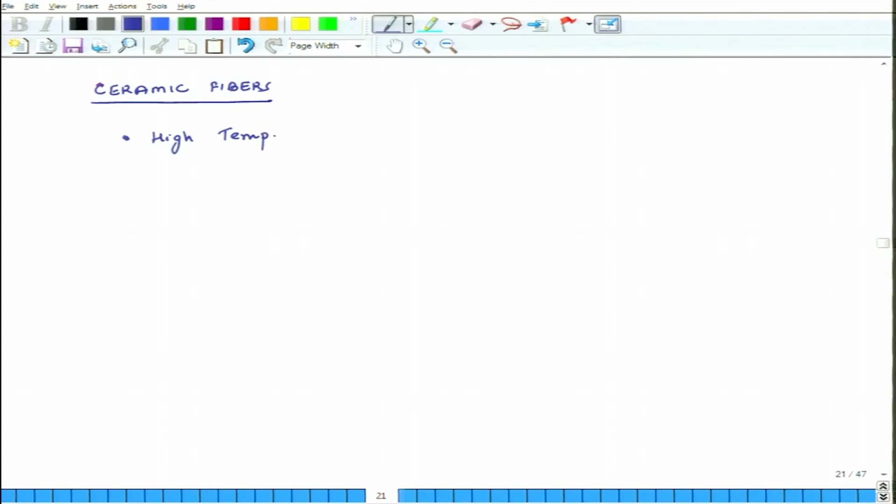Now we are talking about ceramic fibers. Typically these ceramic fibers are used in high temperature applications, because the nature of ceramic material is that it can take a very large amount of heat without getting burnt, distorted, or chemically degraded. So a very important application of ceramic fibers is high temperature applications, because they have high strength and high modulus even at elevated temperatures. You can raise the temperature in case of silicon carbide fibers, which are ceramic fibers, even up to 600-700 degrees centigrade and the properties do not change. In case of alumina fibers, Al2O3, you can go even up to 1300-1400 degrees centigrade and still the properties will not change.

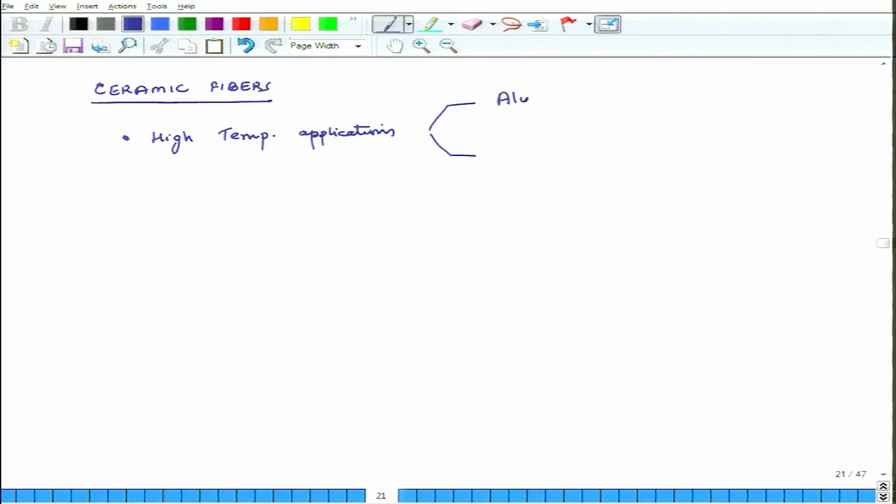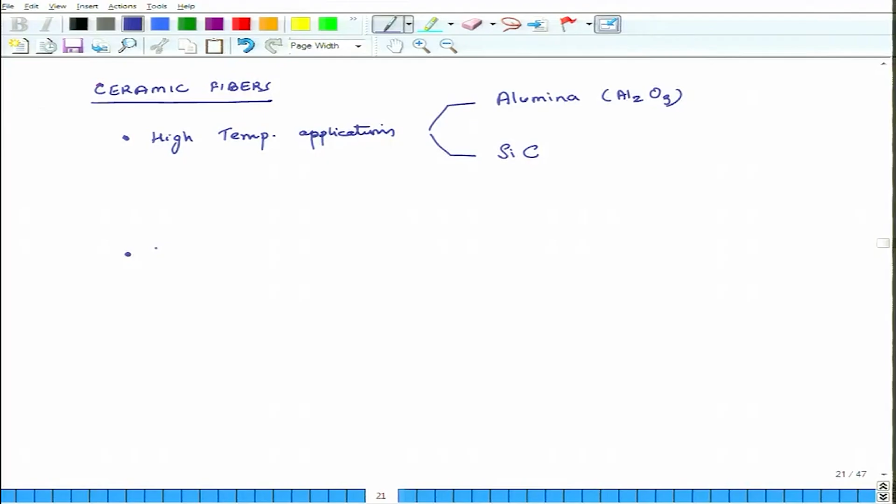Common examples of these fibers are fibers made from alumina and fibers made from silicon carbide. This is Al2O3. So, very quickly, how are alumina fibers made? Al2O3 fibers.

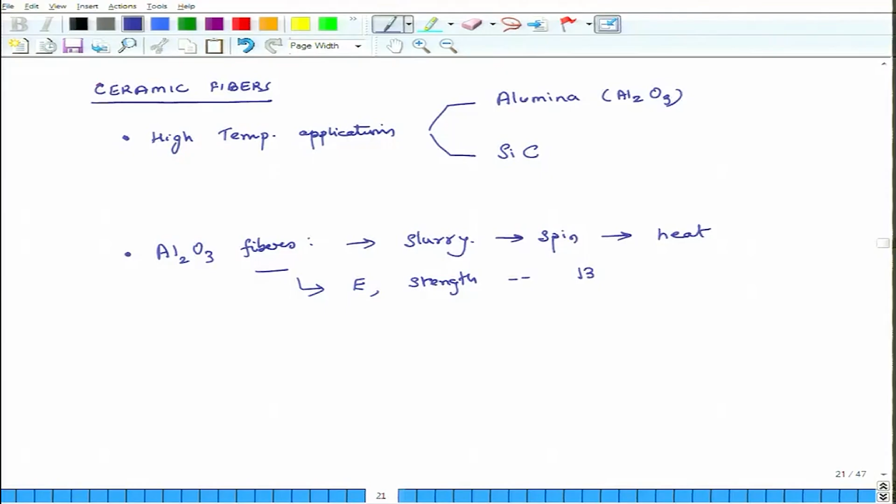You have aluminum oxide, and from that you make a slurry. You mix it with water and make a paste, and through that paste you make a slurry, and then you spin it. You spin it and start getting fibrous shapes, and while spinning it into fibrous shapes, you also heat it, and then you get these fibers. These alumina fibers have been shown to retain their mechanical properties, that is Young's modulus, strength, etc., as high as 1370 degrees centigrade. So this is about alumina fibers.

About silicon carbide fibers - these are made either from the CVD process, which is chemical vapor deposition, or from the process known as pyrolysis, which we have discussed earlier. These fibers can retain their strength up to 650 to 670 degrees centigrade. Where do you use these? I have already said that you use them in high temperature applications, but what kind of applications are there?

Here the fiber is ceramic, but if the matrix starts degrading at low temperatures, there is no point in using these things. So you also want a matrix to withstand high temperatures. They are typically used in metal matrices - metal matrices plus ceramic fibers. These types of composites we had earlier mentioned are known as cemets.

Earlier yesterday we discussed boron fiber, and a problem with boron is that it tends to react with metal very vigorously, which can create problems because of reactivity. But if you embed ceramic fibers - ceramics are very inert materials - in metal matrices, there is not a whole lot of reaction between the metal matrix and the ceramic. So chemically they are much more stable, less reactive, and they have high resistance to high temperatures.

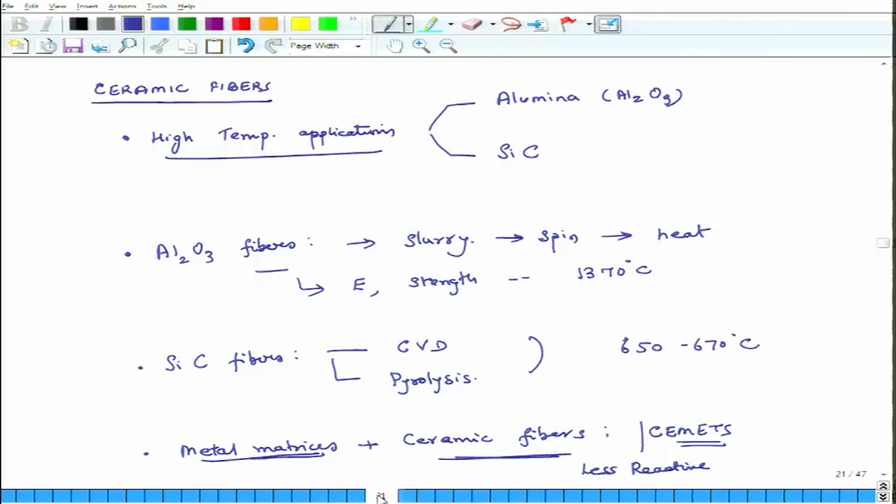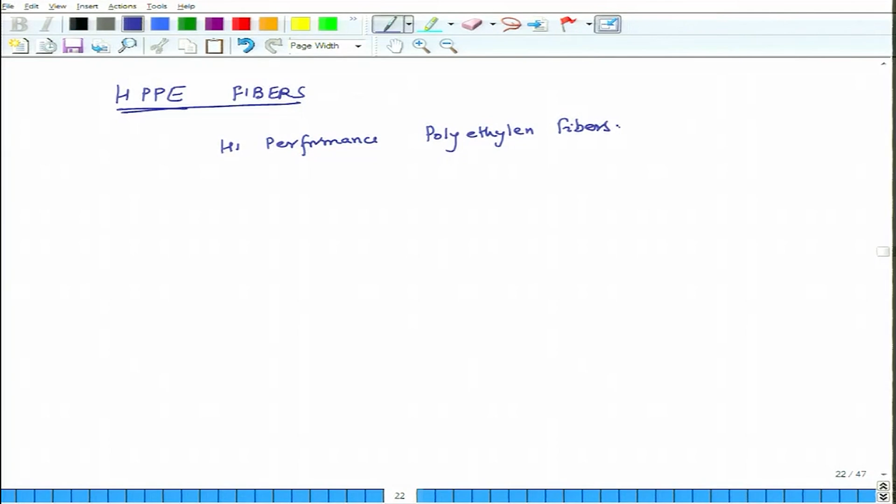The other class of fibers is called HPPE fibers - HPPE fibers. So what are HPPE? This is high performance polyethylene fibers. Now these are very interesting fibers and they have some very neat applications, but before that, they come in different names. So this is HPPE.

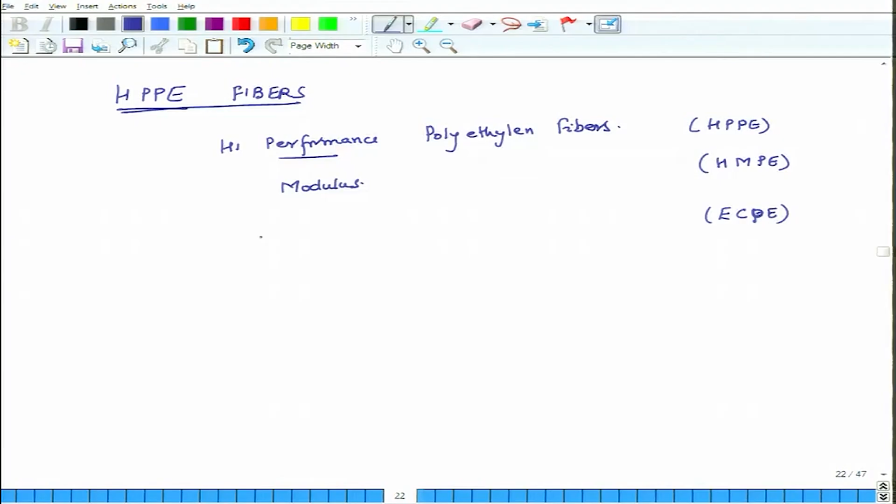Sometimes we also call them HMPE. So what does M stand for? M stands for, instead of performance, here we have modulus - high modulus. And another name for them is ECPE. So these are all common names, it is useful to know that. What is ECPE? Extended chain polyethylene fibers. So that is ECPE, but all of these three, four names, they mean essentially the same thing.

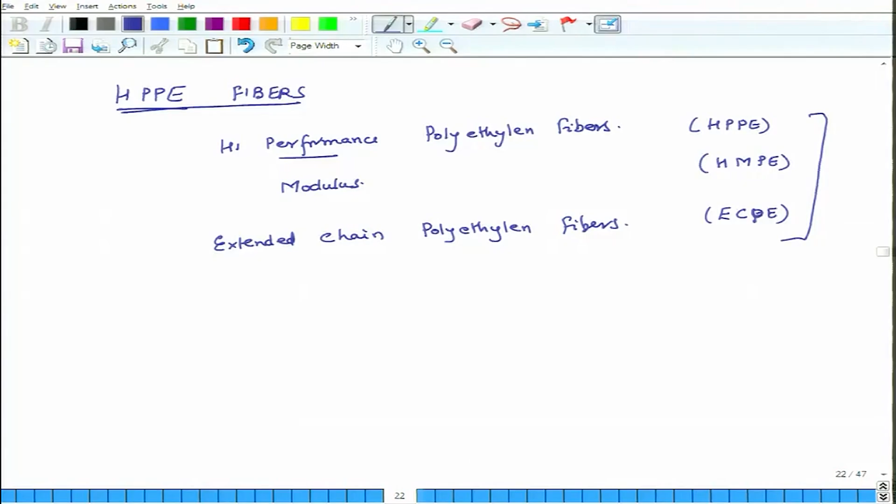In the market, some of the brand names which are known are Dyneema, Spectra. So you might say I need Spectra fiber, that will imply one of the HPPE fibers, but these are brand names. Let us look at some of their special attributes.

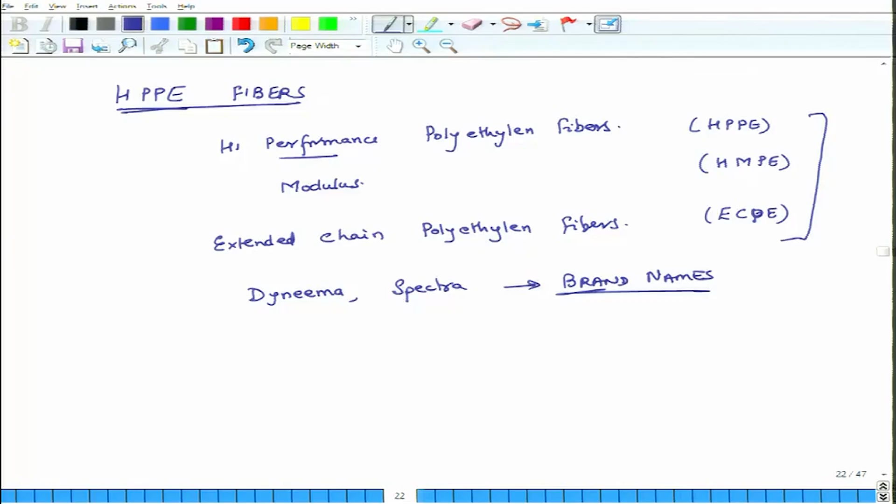We will look at actual numbers later, but let us look at some attributes. A typical plastic, for instance ABS plastic or polyester, if you pull it, its strength will not exceed maybe tens of MPa. Some super good plastic may be 100, 200 MPa. But these HPPE fibers, their strength is very high.

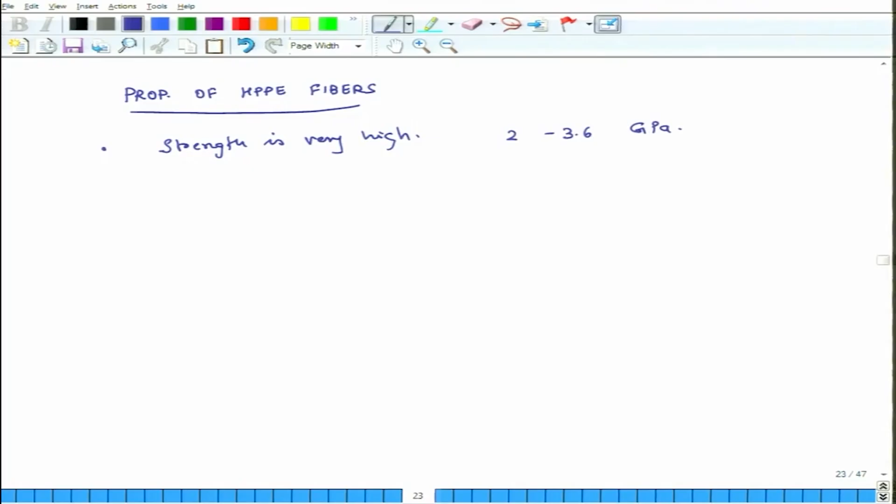What do we mean by high? It could be anywhere from 2 to 3.6 GPa. They are stronger than regular steel. So these are made of plastics, but they are stronger than steel. Some of the best steel may break at about 1 GPa, these are stronger than that. This is similar to the fibers made by spiders, which are also very strong, also stronger than steel. So these are fibers of that type.

Second thing, density is slightly less than 1. So they are slightly lighter than water. What that means is that their specific modulus...

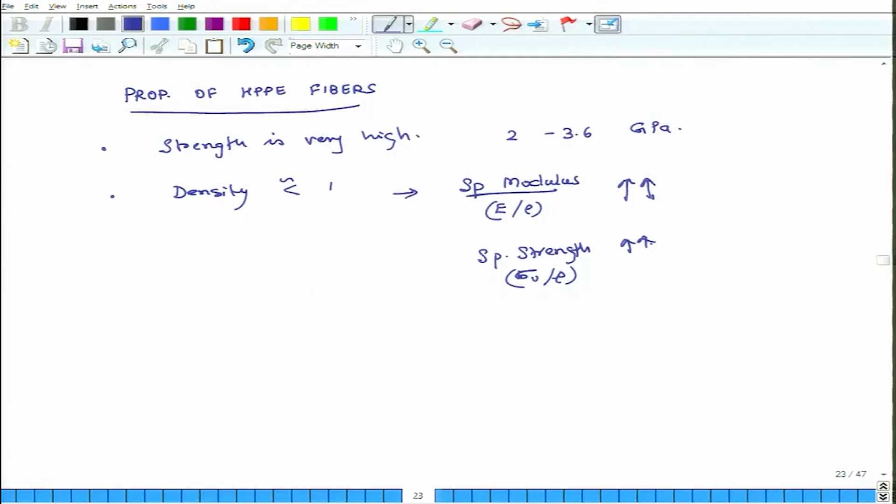What is specific modulus? It is the ratio of E and density. This is very high, so for less weight you can get a lot of stiffness. Similarly their specific strength, sigma u over density, is also very high. So you can use these fibers to make things super light without making them weak or flexible.

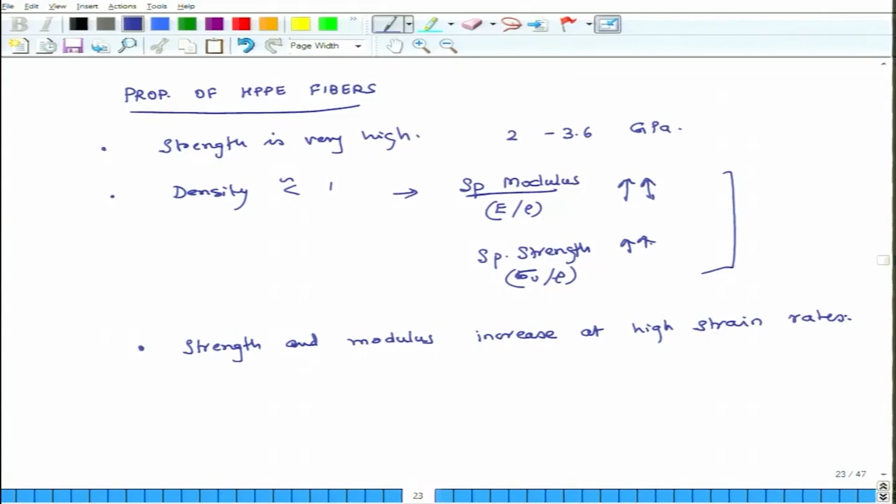So these are very special applications. Third thing, and this is really important to understand: their strength and modulus increase at high strain rates. What does that mean? I will explain, but this is important and interesting to understand.

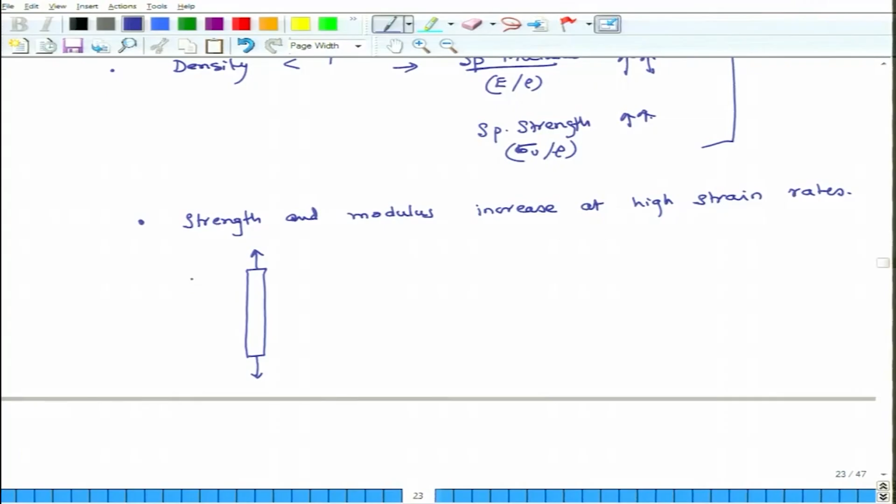If I have a piece of material made up of HPPE, and I pull it, it will experience some elongation. Let us say the elongation is delta and the length is L. Strain will be in the length direction, it will be delta over L, and let us say its modulus in the length direction is some number E.

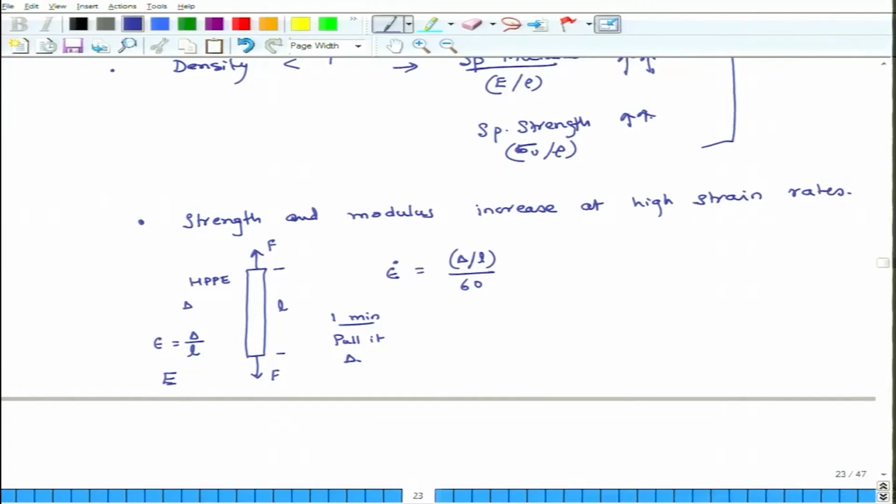Let us say that when I pull it very slowly, over 1 minute, I pull it by delta. So what is the strain rate? Delta over L is the total strain, and I have pulled it over 60 seconds, so strain rate in this case is epsilon naught divided by 60. This is case 1.

Case 1: when I pull it in 60 seconds, the modulus is E, and the strength is sigma u, since I am pulling it very slowly. In the second case, let us say time is 0.01 seconds. What will be the value of strain rate? It will be epsilon naught, which is delta over L, divided by 0.01, which equals 100 times epsilon naught.

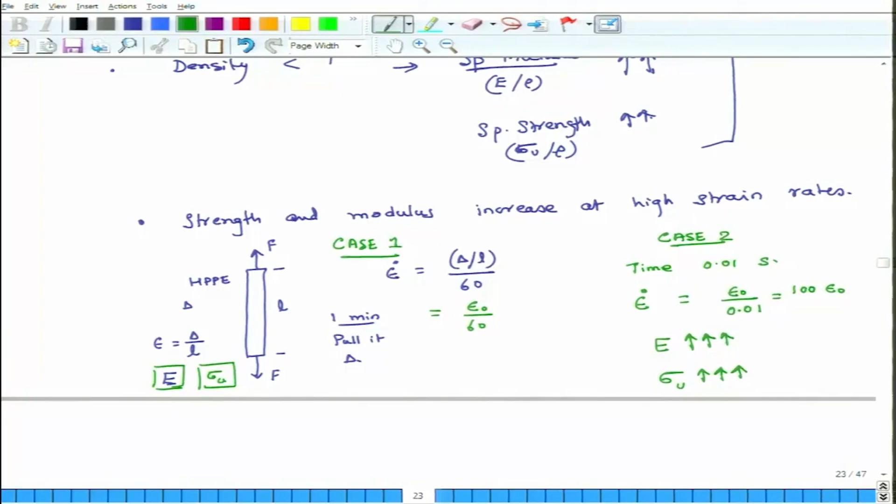So strain rate has gone up significantly. It has gone up by a factor of 100 times 60, that is 6,000 times. I have increased the strain rate 6,000 times. In this experiment, if I measure the Young's modulus, I will find that it is extremely high, and also its strength - if I apply strains very fast, this HPPE material does not break at the same value as when the strain rate was low. So its modulus and strength increase very significantly at high strain rates. At low strain rates it will have some value, at high strain rates it increases very significantly.

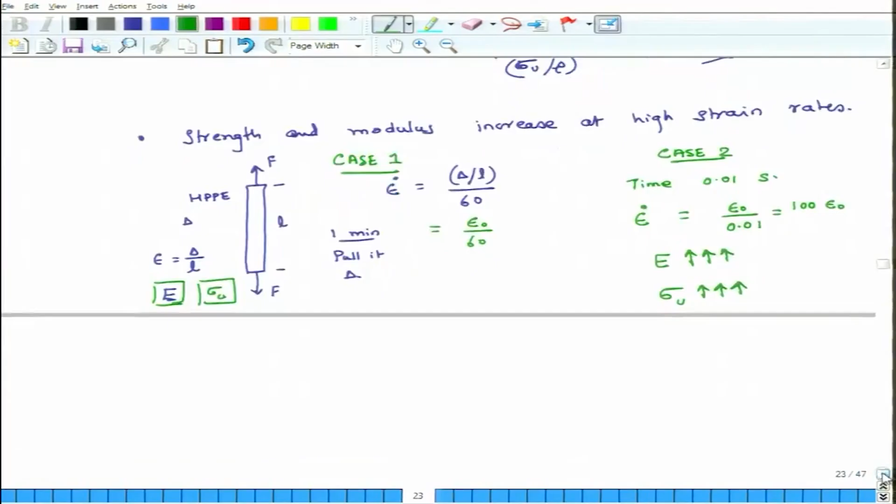Now, with this special feature of HPPE, it is for this reason that a lot of times these fibers are used to make armor, bulletproof vests.

So, you use even Kevlar for this type of application. Kevlar also can take a lot of energy, but these fibers are very light compared to Kevlar because their density is lighter. So, they are even more efficient.

In a bullet impact, you have to stop it in very small time, and in that case the strain rate has to be very large, because when the bullet comes it hits at a very fast speed. So strain rates are extremely high, and the more the strain rate, the higher its strength and modulus becomes.

So these are very efficient materials for these kinds of high strain rate applications, and they are more advanced and have less density.

Kevlar is also good for high strain rate applications, but what is Kevlar's density? We saw it earlier. It is about 1.4 or 1.5. These fibers are lighter than Kevlar, less than water, so less than 1. So for even lesser material you get similar benefits to what Kevlar gives you, which is why these materials are very useful.

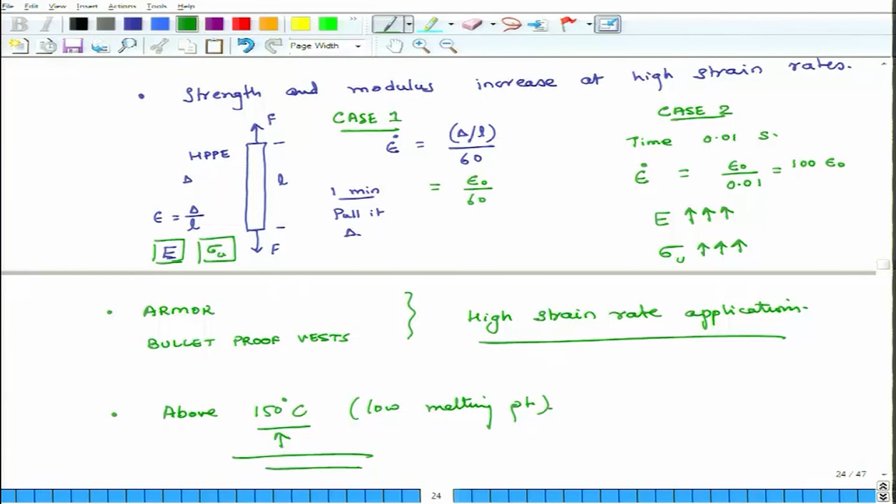Now we have discussed ceramic fibers and HPPE fibers. So finally, what we will do today, and close the discussion with, is look at some of their properties in terms of actual numbers. Properties of ceramic and HPPE fibers. It is important to look at properties so that we appreciate some of the unique things about these materials.

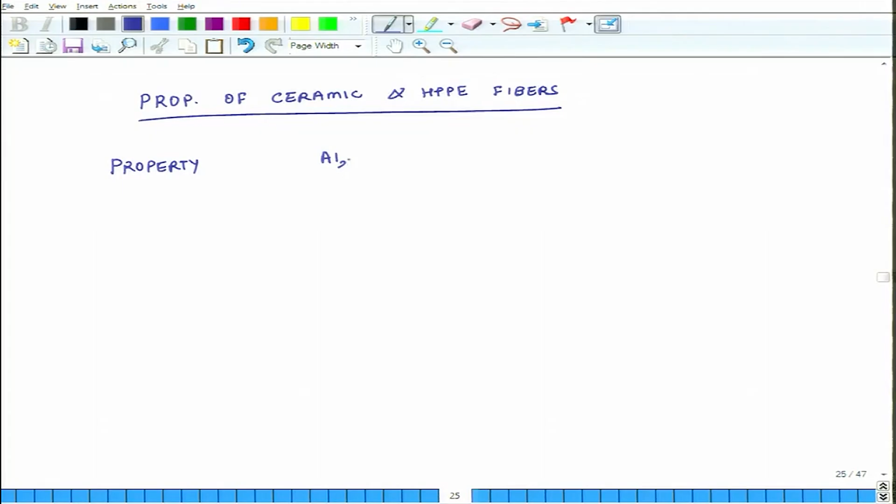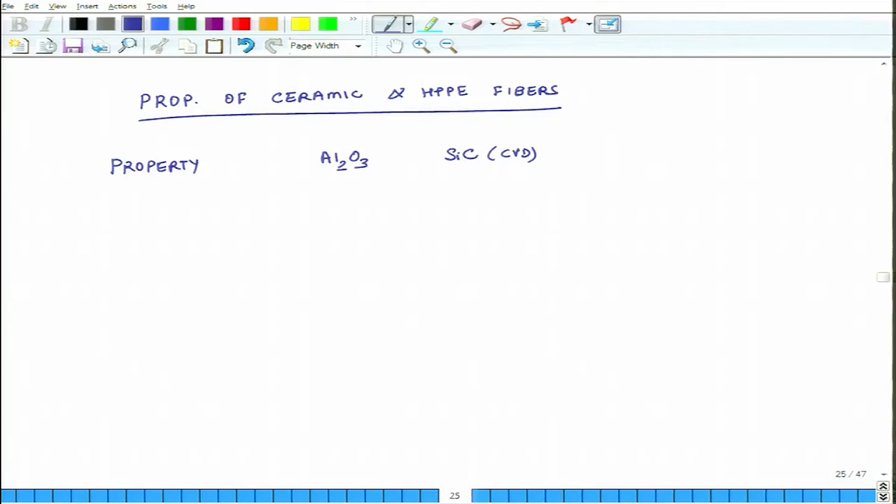So we will again construct a property table and look at different fibers. The first one is alumina Al2O3, the second is silicon carbide fiber made through the CVD process, the third is silicon carbide made through the pyrolysis process, and the fourth is HPPE.

Let us look at diameter in micrometers or microns: 15 to 25, 140 - so silicon carbide fibers are fat, they are thick, but if you make it through pyrolysis you can make them really thin, so 10 to 20, and this one is about 38 to 40 microns.

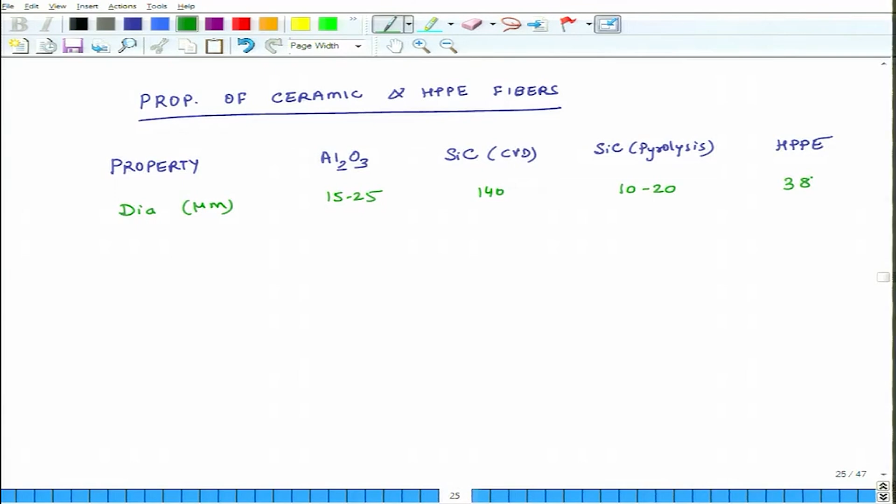Specific gravity: 3.95, so these are heavy, okay; 3.3; 2.6; and this one is 0.97. Then we have tensile modulus in GPa.

This is about 379, 430, 180, this is 62 to 120, okay.

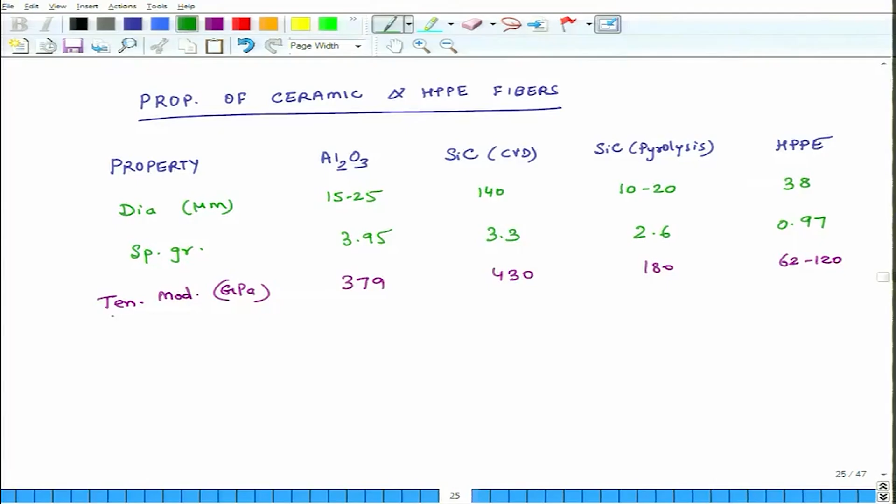And then let us look at strength, in MPa: 1380, 3500, 2000, and this is 2180 to 3600. So this is the main thing.

If you divide these numbers by their respective densities, you see that the specific strength of HPPE is really very high. Even for tensile modulus, it's pretty high compared to alumina and silicon carbide fibers, because once you divide 120 by 0.97 you may get something like 130, but if you divide 379 by 4 you will get less than 100.

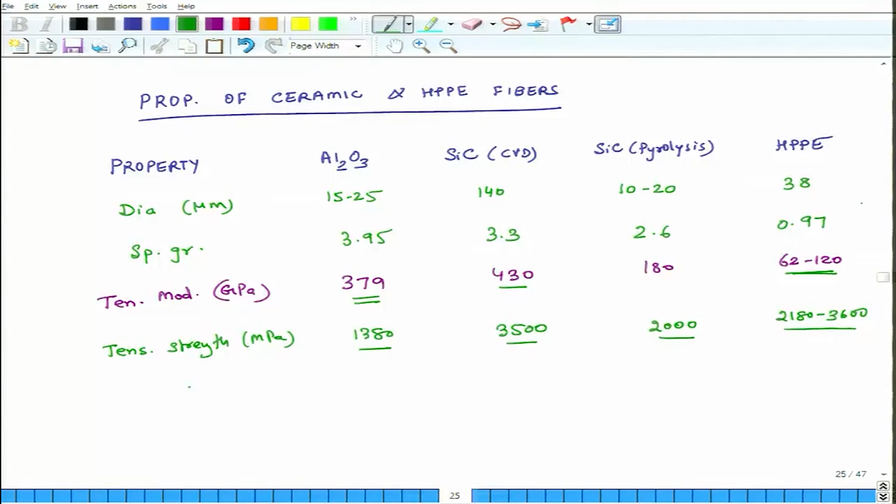So this is something important to understand, and with this we close our discussion on fibers. I hope through all these discussions and the tables which we have written slowly, rather than just showing data and saying these are the values, you now have a good understanding of the world of different fibers used in composite materials. They come with all sorts of properties, and it is upon you to figure out what your needs are, what economic constraints you have, and which particular fiber best meets your needs.